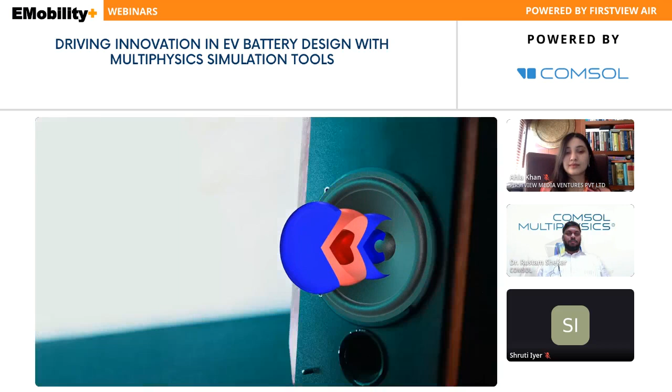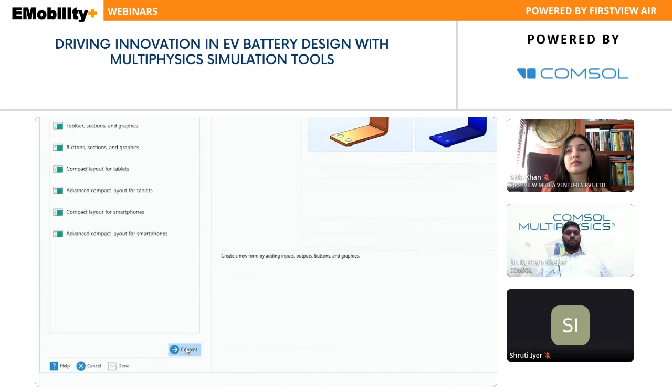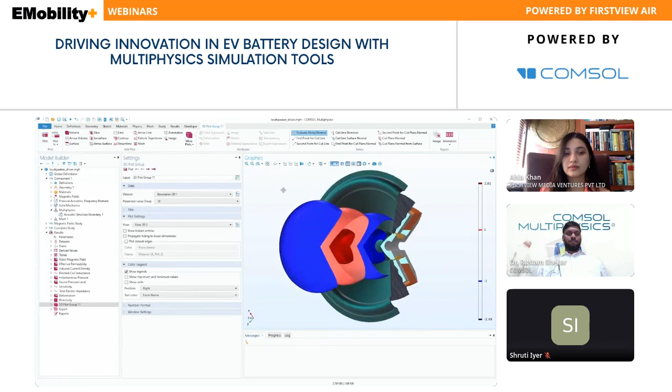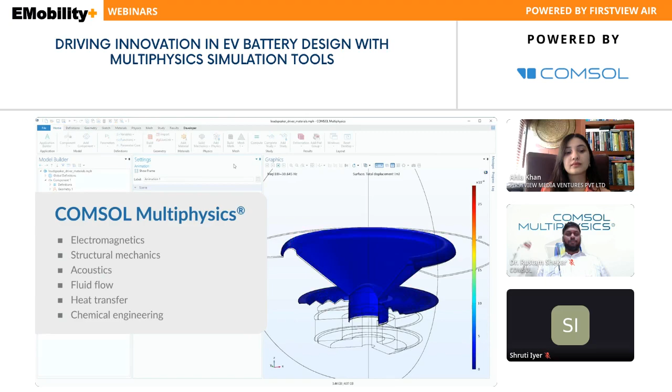Developing designs and performing experiments virtually is both cost and time efficient. With COMSOL multiphysics simulation software, you can be sure your results accurately represent the real world. By studying multiple physical effects on one model, no matter the order in which you combine different physics, the software handles them together and solves the mathematical and numerical model equations and provides you with the model results. The entire simulation process takes place in the same software environment. You only need to learn one workflow, no matter the physics involved or the nature of your experiments. Depending on the scenario, you may want to model single physics, one-way multiphysics, or fully coupled multiphysics. The COMSOL software offers all three, and the true advantage of COMSOL multiphysics is the ability to model unlimited multiphysics, where all physics in a model interact, affect each other, and together influence the model results. If you need to add any physics, including your own equations, to your model, you can. The application builder in COMSOL Multiphysics gives you the tools to build your own simulation apps. The Startup Wizard and drag and drop functionality help you quickly turn your models into simulation apps with customized user interfaces, restricted inputs and outputs, report generators, and more. This way, you can spread the advantages of simulation to colleagues and customers by compiling your apps as standalone executables via COMSOL compiler, or by making them accessible by web browser via COMSOL server. Understand, predict, innovate, and optimize your processes and designs with COMSOL multiphysics.

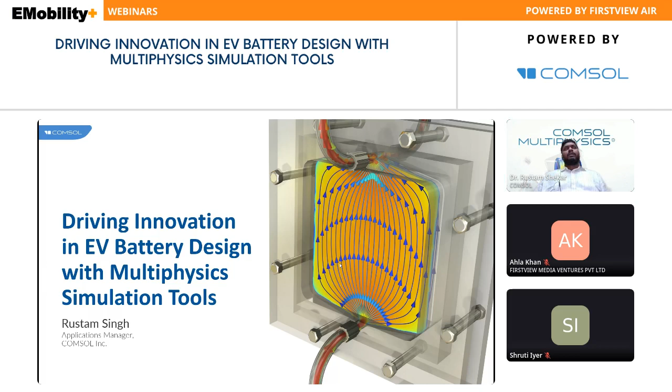That particular process may generate some losses, because no process in this world is fully efficient. Because of this entropy, you will get some heat generated. Now if you want to account for that heat generation and its effect on the battery system, we will take account of heat also. So this way the problem grows, and it becomes multiphysics in nature. You'll see how that particular problem can be handled.

Now let's see the entire scenario as a whole. What we see here is an electric vehicle. If an electric vehicle needs a power source, it will be driven by batteries or fuel cell. If you drive it with battery, you will have battery systems, and around that there may be different kinds of other setups involved - electric motor, generator, and internal combustion engine. If you have a hybrid vehicle, which is a current trend in India where you're getting multiple hybrid vehicles, those hybrid vehicles will have engines and batteries both at the same time.

Now that problem becomes more complex because sometimes you want to run your vehicle with the engine, sometimes with the battery, and when you switch from one power source to the other, the powertrain also changes. Based on that requirement, your power demand and your major data for information about your battery - the performance side, let's say temperature, or the SOC side, SOH side, or the thermal and heat generated due to that - will vary.

So that information will vary a lot. If you are able to simulate that particular scenario for your requirements, it will be much better to get a vehicle or battery pack which can fulfill your requirements without failing. So there is one more concern you can face, where there will be failures also.

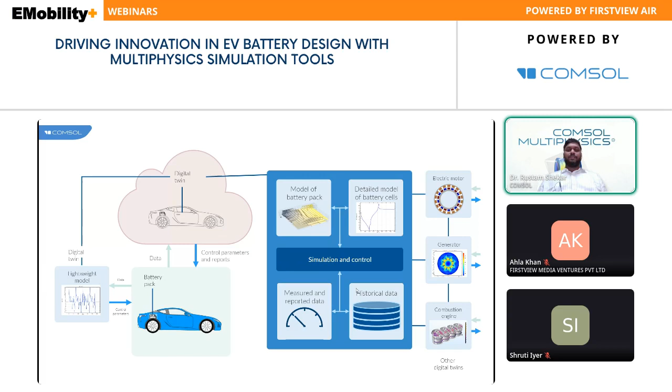So what we see is we have this battery model, and then you can generate digital twins out of it, where the digital twin can be trained using the battery model, experimental data, measured data, reported data, and historical data. Combining all of that gives you a realistic battery model based on physics, along with the digital twin trained using the multiphysics model and background or historical data.

Now, when you want to model the battery, there can be multiple scales you're interested in. Some people may want to know how a particular battery is built because they are the battery manufacturer. In India we can see this trend now, people are going towards manufacturing batteries on their own. Earlier, the trend was people getting batteries from other countries and assembling them into a battery pack.

So these are the different scales and different kinds of problems people face. When you are a battery manufacturer, you have access to all the material properties, so you can make a battery model very easily. But when you don't have that material property available, what happens then? In this case also you need to analyze your battery and make a battery pack out of it. These are the general problems people face.

Now let's talk about another problem engineers in India may face. Earlier they were working on the engine side, and mechanical engineering background people were working on that. Now there's a trend where those same background people go and work on the battery side as well. Because of this background difference, where more detailed electrochemical knowledge is required, there will be some problems modeling those batteries.

So you can see multiple problems people may face, and you want to answer those queries to make a battery pack, or use those battery packs into a complete vehicle. This is the problem and context we are going to address in this case.

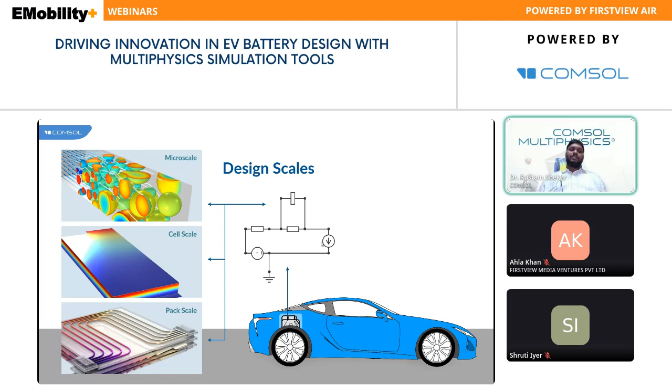Now there's one poll I just want to launch. I want to know if you are using any simulation tool, or using COMSOL, or you are attending just for personal interest. So what are you doing right now in modeling, and what do you expect from this session? I request the team to launch this poll so we can get responses.

I hope you all can see the poll in front of you. We just want to know: are you a COMSOL or regular simulation user, or are you new to multiphysics simulations, or are you attending for personal interest, or are you evaluating simulation tools for any ongoing or upcoming projects?

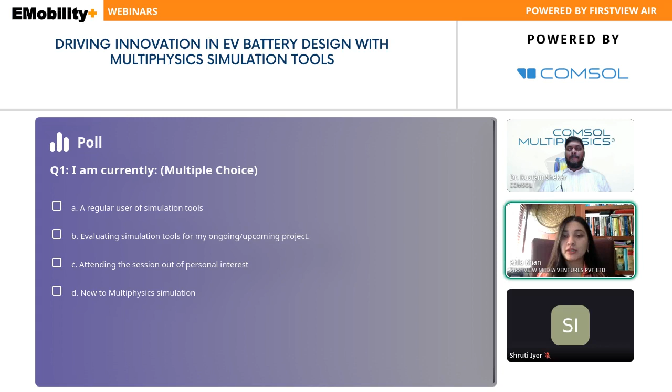Okay fine, thank you. So as we were discussing, we will be addressing those queries. First we can introduce you quickly to the tool we're talking about, COMSOL Multiphysics, how it can help you, and then how it looks, what kind of capabilities are available to fulfill your requirements.

Let's say you're starting a project where you are at the modeling stage, and there will be a team involved in that. So how can that particular tool help you at all those stages?

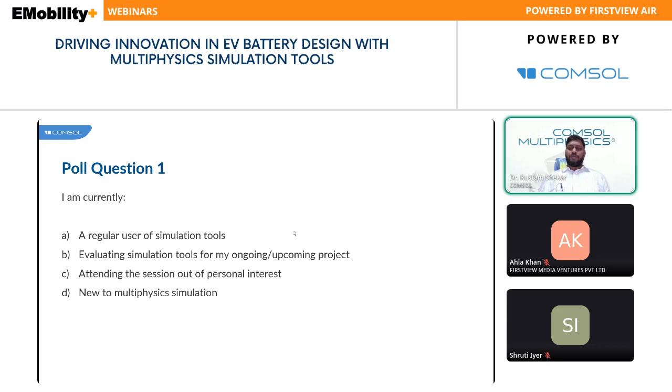Just to start with, this is the COMSOL GUI, the COMSOL Multiphysics suite, where we have one platform called COMSOL Multiphysics, and then there are different other physics which can help you design different aspects of your e-mobility components.

Here we can talk about the battery design module, fuel cells, and we can add CFD and heat transfer to get a better model. In some cases structural mechanics also plays an important role, so that will be there too. You may be interested in any kind of RF or AC/DC electromagnetic components, and then you can couple it with different tools like MATLAB, Simulink, or other CAD tools.

So now you can see if you have any problem which is multiphysics in nature, and if you talk about battery specifically, it involves features from the battery side, it may require features from the chemical reaction side, it may require features from the corrosion side. This corrosion is an area people generally neglect.

Let's say you have a battery connected to a terminal. Now the terminal and the battery are both metal, and it's exposed to humidity. Over time you will form a galvanic pair, and that galvanic pair will give you some contact resistance. Because of that local heating, you may see local failures occur. So you may need corrosion modeling, heat transfer and CFD modeling, and when you want to design flow fields for your cooling channels, there can be pipe flow involved.

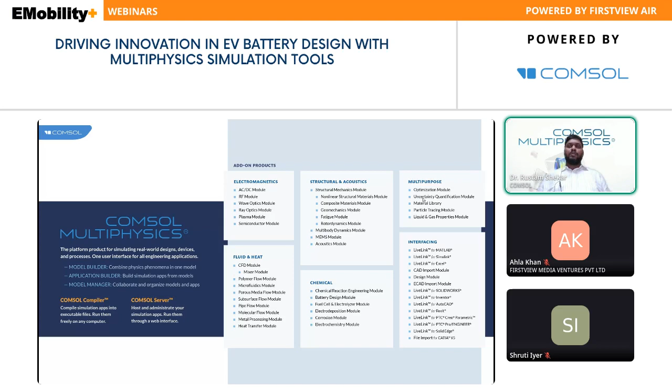For now, we will just go through the introduction for COMSOL and then see the battery design module. Here, if you want to work on a problem which is single physics in nature, as we discussed in battery.

You can just focus on the heat transfer, you can focus on the fluid flow, you can focus on the electrochemical reactions, or you can focus on the structural part of it. So the problem can be single physics.

But in other cases where you have a problem which is multiphysics in nature, and you want to solve all those physics and coupled behavior all together, then it's a multiphysics scenario that we can solve for.

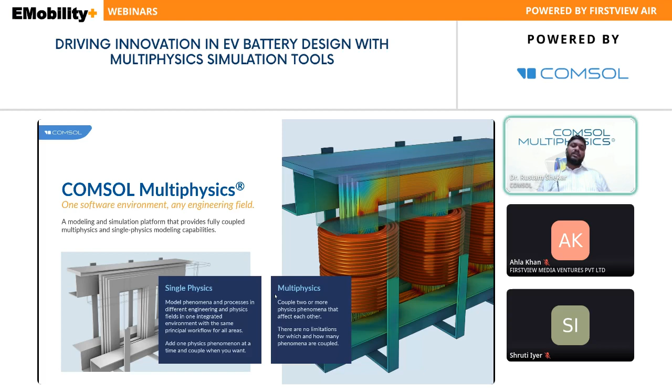So now to do that, we have this environment, the COMSOL GUI, where all required things for the modeling will be available.

Let's say you want to make one geometry, assign materials to it, assign different physics, and then couple all these three physics by using this multiphysics node.

And there can be multiple analyses which you may be interested to do, so different analyses can be done by the same interface. Ultimately you can post-process and draw conclusions from those analyses, and post-processing will also be available in the single GUI.

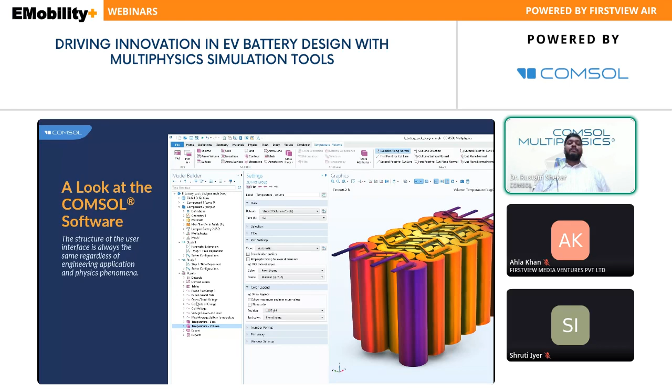So you can see things in detail, let's take one battery example. To make a model, first you need a geometry.

So you will take the geometry, and that geometry can be an imported one. It can come from any CAD tool, or else you are creating a parameterized geometry here itself.

So then you can create that geometry, and the geometry can be parameterized. You will have all those operations, let's say extrude, work planes, and so one complete parameterized geometry can be created here.

The next thing you may want is to identify which domain is built of what material. So there will be one battery material, air surrounding the battery, aluminum for bus bars, copper for bus bars.

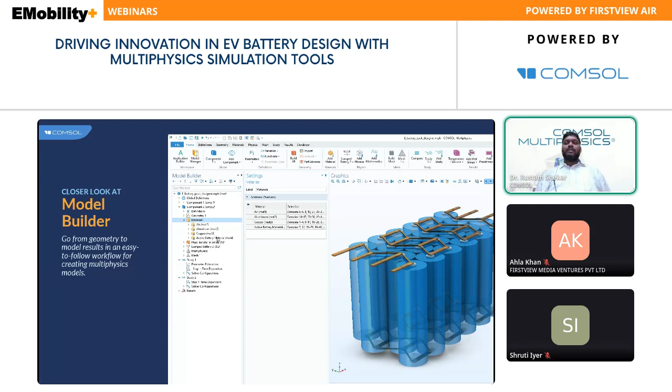And then you have the active material which is for the battery. So we know how my battery pack will look like, what components will be there, and what material they will be made of. So we'll have the geometry and material defined.

And those materials may have different properties which may be required, or which may not be required. So all material properties will be listed, and the required material properties will be highlighted in this case.

And next, you want to know how that will function, meaning which physical phenomena will govern this particular device. In this case, we know that for the batteries we want to analyze, we use the battery physics, and that battery physics can be detailed.

Here you can visualize and see which equations you are solving. When you know which equations you are solving, you will be confident that whatever you are solving is good enough, or else you want some modification and want to correct them. In that case, corrections will also be available for you.

So it's not a black box which you are solving, and then you can get confident about the physics which is running in background. You may see, in some cases, other physics also comes into picture. Now here we want to add heat transfer to it.

So this is one general form of heat transfer which we are going to solve. And now your battery material may require specific space dimension, material properties. So when you see a jelly roll, through the plane and across the layers, along the layers, there will be different conductivities you will experience. So if you are able to assign properties where they are non-isotropic in nature, that will help you get more near to reality. So those kind of specific features you can see to design those kind of batteries.

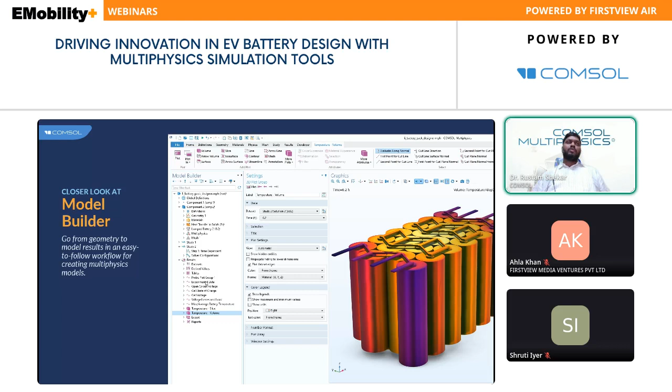So that way, you can do your entire modeling study. So now you are one modeling engineer who knows things in detail. So you are a modeling engineer or the app designer. You can create a model in detail, and that model has all required details, and it is a completely editable model which you have, and you can create models for different scenarios.

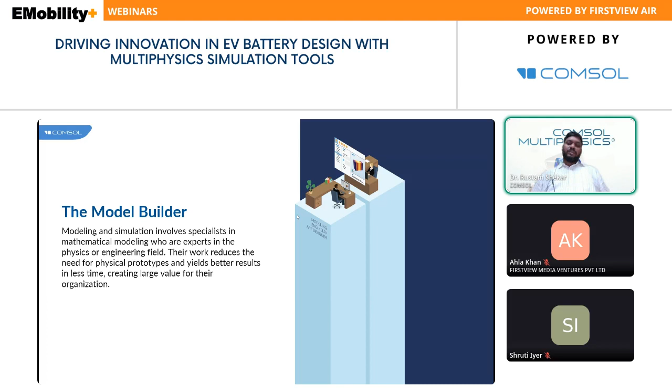But let's say you want to collaborate with your team, and the teams may come from different other backgrounds like mechanical, electrical. They can be from non-technical background like sales. They can be from marketing. They can be from different other departments. So then, what you can have is you can create simplified GUIs, which we call applications.

So the app can be created by using those models, and the real model which you have built will be running in background. So that way a different GUI will not require much competency and much knowledge to solve that model, but the other team can just put some inputs, and then they can visualize the results which they want. So you can create one customized GUI for different teams for the same model.

So let's say you want to create a model for your design team. There you just want them to change geometry, and then they will change the geometry and analyze the different designs with that. You want to make a model or app for your sales team, so then they will go in the field and demonstrate how your models and batteries are behaving for different conditions. So then that sales team will take that app, which is a very simple GUI. They can put in that number and run the model in front of their clients and customers, etc.

So it is not necessary to have that technical competency to work with those kind of applications, and those apps can be designed very detailed, very simplified, for different aspects and different kinds of people. So collaboration is one key thing you can make sure of.

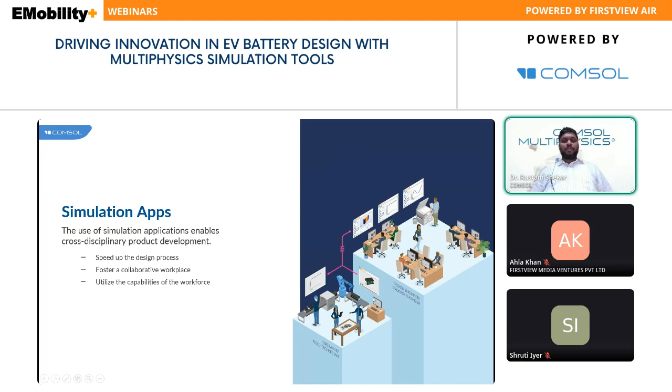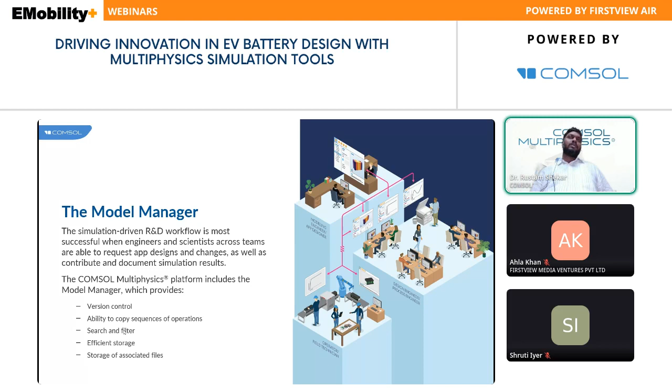And then we can host this entire research or the entire project into a model manager, where you can do the version control. You can provide different kinds of filters. You can efficiently store your models, and you can provide specific access to specific people. So then you can control your research and maintain or ensure your privacy as well.

So this is one brief introduction of how you can deploy this tool for different aspects and different areas. Now I just want one more piece of information from the audience: which problems do you face in battery analysis?

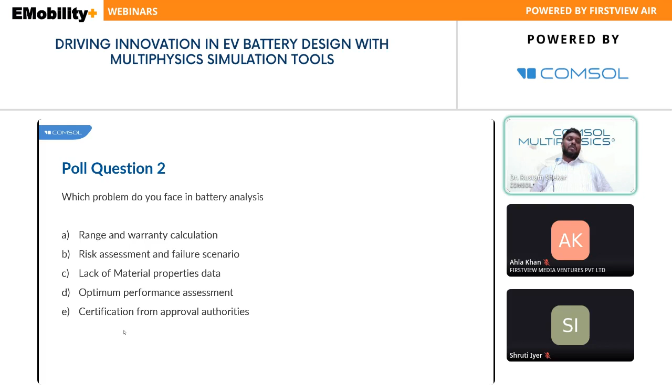Is it the range which you are talking about? Is it really risk analysis, risk and assessments, or lack of material property data? You don't have material property and you want to do a modeling part. You want optimum performance assessment, or you want help in the certification from the approval authorities.

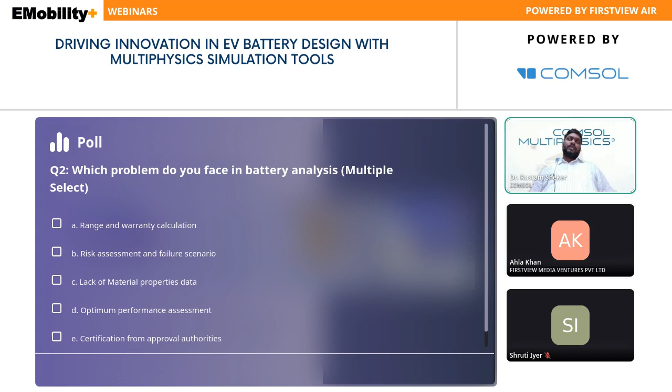So while you're providing responses, we can talk about the things which we are going to talk about. So we will quickly be seeing what all you can do when it comes to something very specific, battery modeling in this case. So I hope you can see the presentation now.

Yes, sir. Okay, thank you. So what we'll do is we will see how we can utilize this tool for your applications.

So when we talk about battery, the first thing that comes to everybody's mind will be lithium ion, but it is not necessarily that you are working on lithium ion. You may work on lead acid batteries, which are conventional batteries still being used for auxiliary power in bigger and smaller vehicles, and they are a bit cheaper also. You may be working on future technologies like sodium ion batteries or flow batteries for large scale energy storage, or you are working on a current trend which is lithium ion battery.

So when we talk about battery modeling, it is not only about lithium ion; it can be anything in the domain. So if you wish to work on any kind of battery, all major battery chemistries can be modeled. Why is this possible? Because you are working with the Nernst-Planck theory, and the Nernst-Planck equation can handle any kind of electrochemical setup. Only the mode of mass transport and materials may be different, but the physics will remain the same to drive that kind of particular setup. So we have the Nernst-Planck equation to solve for them, and then there will be different chemistries, different components like porous electrode and solid electrode taking part in those reactions. So we have the Nernst-Planck equation which can handle all kinds of battery chemistry.

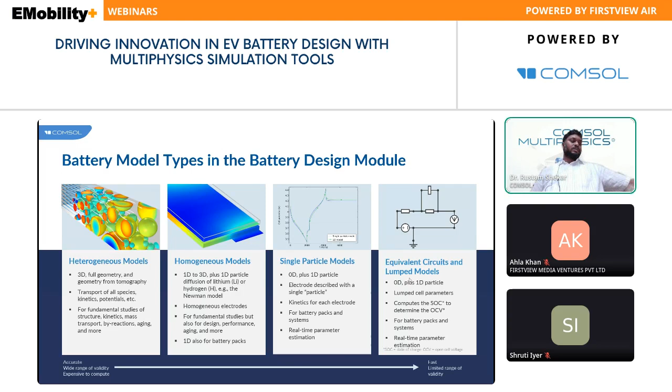So now we can see two different groups: those who work on fundamental batteries and have material property, and those who want to make a battery pack, or don't have permissions to tear down the battery because of NDA issues. Either way, you can utilize these tools - various problems and various groups of people can use this tool for their applications.

Now let's talk about different scales. Let's say you are at micron scale, or pack scale, or you're starting from micron scale and want to go up to pack scale - that entire range will be available, so you can model those different scales in this case.

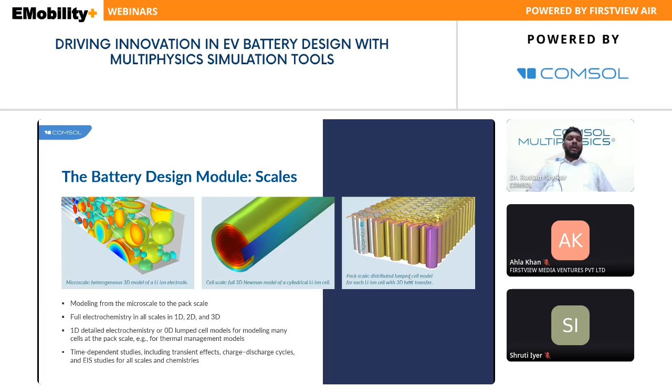So there will be a full electrochemical model, and you can do the thermal modeling in this case. Now we know how we can model one battery with our available data, based on our background and the level of complexity we want. There can be different kinds of studies possible - transient studies, impedance plots, and you can utilize them for parameter estimation.

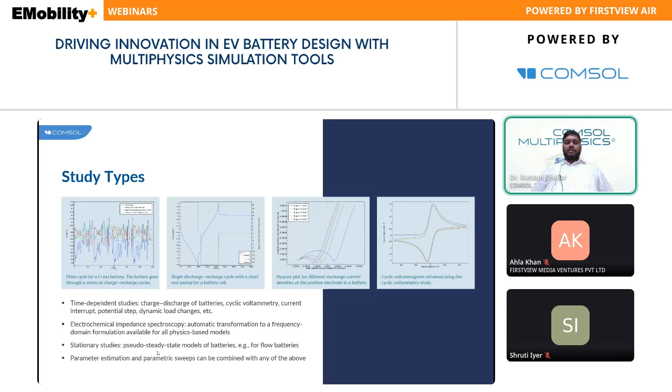These are the typical studies we discussed earlier, which can be utilized to validate your model, to do parameter estimation, or to analyze parametric sweeps to know the performance at different operating conditions. Let's look at one simple model, a 2D axisymmetric model.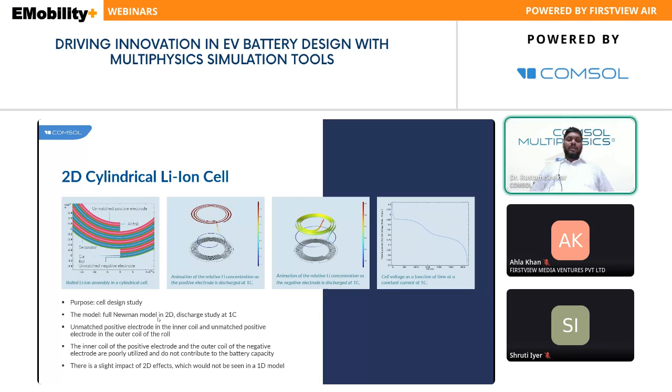Now you may get interested to know, what if I want to make a 3D model? So let's say you can make a 3D model. But what happens when you go by jelly roll or pouch cells? We just want to know: should I stay at the 1D level, or should I go to the 3D level? It is possible to create a 3D model.

But what happens when you compare your 1D model and 3D model? There's only a 2% deviation. So wherever required, you can utilize the 1D model as a heat source or as a performance indicator, and 3D models may not be required.

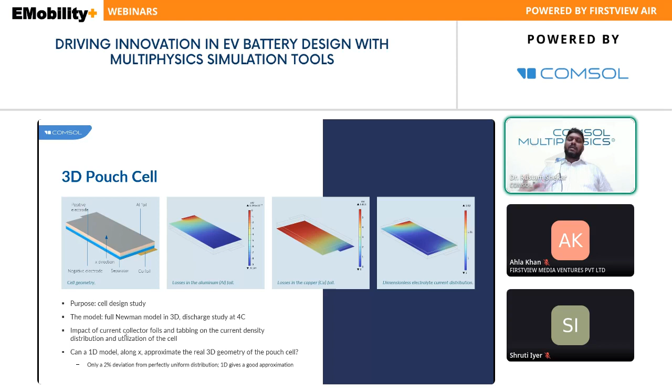But in some cases it is required—let's say you want to design different tab conditions, try different tab locations, try different materials, or make modifications to the geometry. You may have a jelly roll or a stacked prismatic cell. There are various kinds of analyses and ideas being implemented nowadays in batteries, so you can try those 3D setups also.

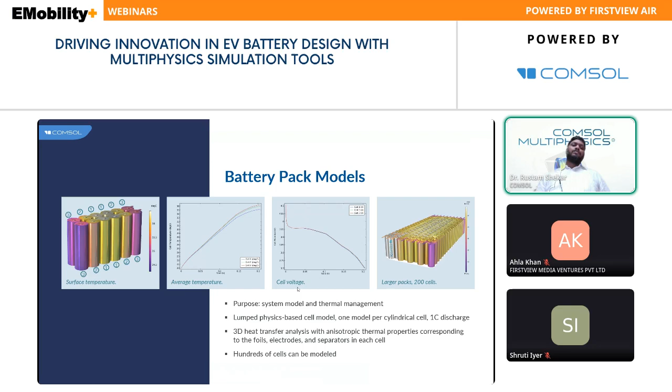This is all about the battery specifically, but for people who want to make a battery pack, I can create a battery pack model for them, with systems and models to be built. In this case, we can extend those lump models to build a 3D thermal management model. So you have a 0D lump model, add 3D heat transfer, and create one battery pack model with that.

But why is this required? Why maintain temperature or thermal management? There are various scenarios where cooling is needed. You have accelerated degradation, like SEI formation and gassing, at higher temperatures. When you cool it down to the optimum temperature you want to maintain—around 25 to 45 degrees Celsius—that will slow down your deterioration. So you want to cool down the battery to slow down degradation mechanisms.

Let's say you have a battery pack and there is hotspot identification involved. You design your battery pack for uniform temperature or a controlled temperature gradient, but then suddenly you figure out there are hotspots. Those hotspots can lead to accelerated aging and may even give you a risk of thermal runaway, so that local point is pretty dangerous. If you want to identify whether your design has any hotspot, we can do a coupled analysis for thermal management and hotspot identification.

If you are selling or making a vehicle for a cold environment, you also want to maintain the temperature around 25 degrees Celsius. All these things I'm talking about are in the context of lithium-ion batteries, which require a temperature range of about 25 to 45 degrees Celsius. So we want to heat up the battery at startup or when working at low temperature conditions.

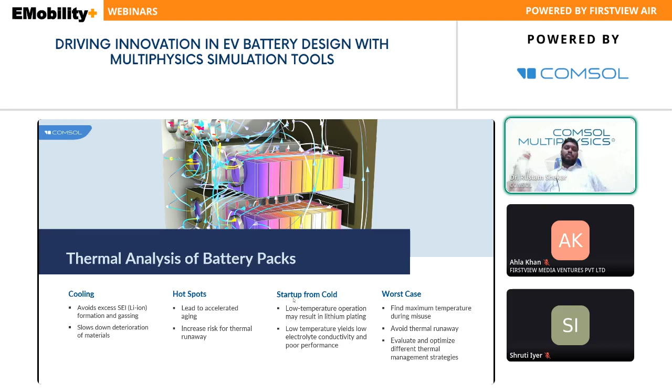And in the worst case, it can fail, and you want to know the thermal behavior of the batteries so you can analyze those battery packs. So what mode of heat transfer will be available?

Generally there is conduction, which is taking care of everywhere. In the battery, you will see it's all solids, even the gas filled in it or the fluid material filled in it - it is conduction only. So the first thing you want to solve is conduction, and then later you want to solve the advection if you are having active cooling.

You may have air cooling, immersed cooling, or any kind of cooling channels. So advection can also be solved at the same time, whether laminar or turbulent flow, where you can deploy fans or any kind of cooling channels. So those scenarios are also available in the case of advection.

Conduction and advection are sufficient to analyze one battery and battery pack, but you may see one scenario where you park a vehicle in an open environment, and sun rays coming on that vehicle cause your battery to heat up.

So if you want to know where to place the battery in the vehicle, you want to know whether radiations will affect your battery, because you can place your battery very near some other component, and that may radiate heat - let's say a radiator which is cooling the battery may radiate heat. So the location and orientation because of radiations will also be important.

Surface to surface radiation, surface to ambient radiation where it is cooling down, and ambient to surface radiation may also play a role when you want to test it for those conditions. So then you can integrate all these three and see how your battery will perform in conduction, advection, and radiation cases.

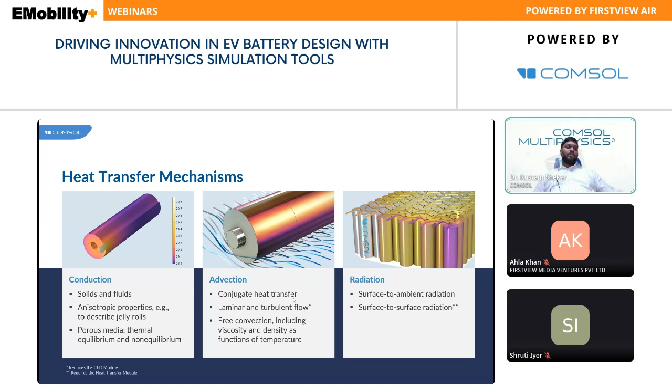So we know why to do thermal management, and now we know which approaches we can deploy, including battery modeling. So what will couple both of them? Your heat transfer and battery get coupled by using these heat sources.

The heat sources can come from joule heating, electrochemical reactions, heat of mixing. If you're able to plot them specifically, what you obtain in this case is the different components which may give you that heat source.

You have the joule heating that comes from the conduction parts, the ions and the conductors. You can work on those materials if it's in your control. If there's a chemical reaction, then if it's any kind of catalysis you can work on it, or else you want to limit your operations for certain C rates, certain loading conditions.

And then you want to give a warning to your user that okay, don't go beyond this speed, don't go beyond the C rate. So those electrochemical reaction or joule heating scenarios can be calculated, and then you can give the exact warning when you want to provide a manual to your user.

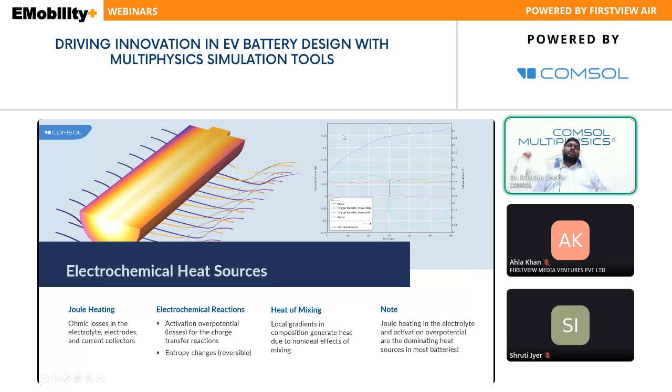So now you know what heat source is available, and you're plotting them individually. So you're making sure that you're talking about the right things in this case.

So let's just take one example - what will happen. Let's see, we have one huge stack. We talked enough about individual cells and the battery. Now we'll talk about one huge stack.

This huge stack has four lines, and for each line there are 14 cells, and there are 8 modules available. This gives you a very huge stack which is having 300 amp-hours per line, and then you can generate 360 volts out of it. So one huge jumbo stack is available to you.

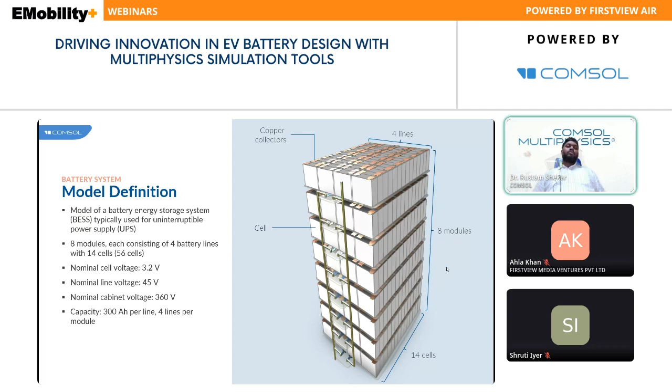So to pull down the heat, you may require a thermal management system. There will be plates available, and in that plate we will have coolant flow, with flow in vertical pipes and horizontal channels, and you will see the coolant being used for that.

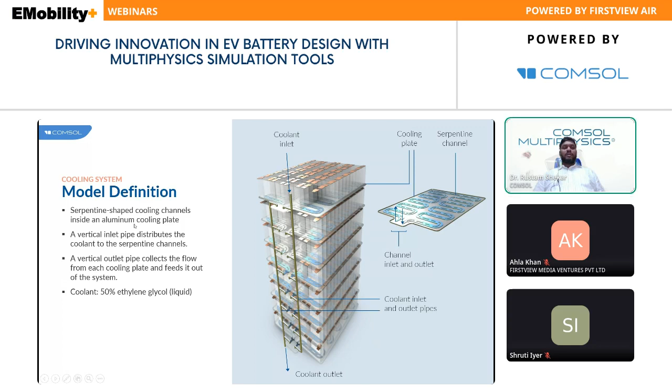Now let's say if you want to make a battery pack model, then you are focusing on voltage loss and capacity loss, and in this case you are seeing the equations being solved. One detailed model gives you heat sources, and if you run it for 6 months or 1 year, the variation in heat sources can differ from the first cycle to the last cycle.

So you bought a vehicle, initially it was not heating up much. After 1 year you see the heat generation is more, so you have to deploy more coolant, and that eats up your battery more, and again you are losing capacity. So that cascading effect will be there, and ranges may get decreased.

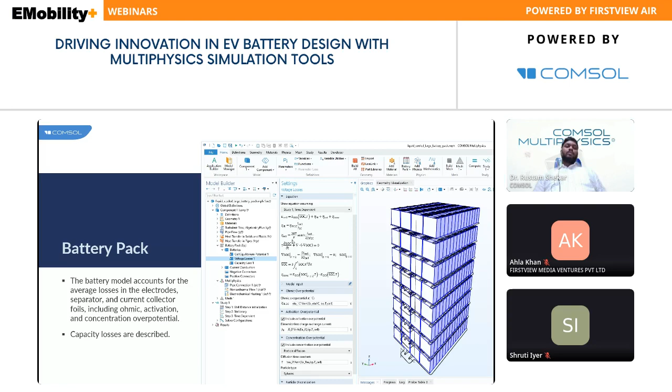So you can solve voltage loss and capacity loss at the same time, and both will affect each other, and ultimately you can couple them by heat transfer, and generate results like this, where we are seeing the temperatures, the electrochemical profiling, what is the maximum temperature, and what flow rate you need to provide for optimum cooling.

So now we can identify the hotspots, identify what the flow rate will be, how the battery is performing for that particular condition, and monitor the maximum temperature. So this covers all three concerns, where performance, risk scenario, and capacity are being considered here.

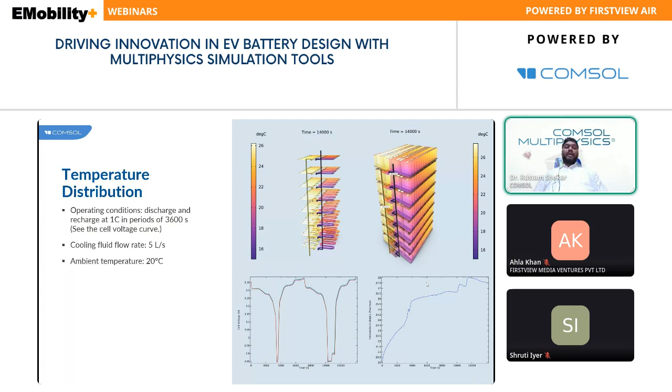So now let's see one example of how that will be built in COMSOL. We can open one COMSOL interface, and the same model can be used.

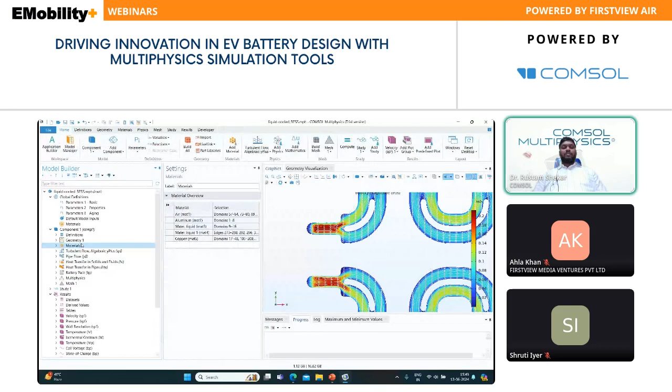So this is the GUI we talked about, and here we have the geometry we want to work with. Let's hide this. So this particular huge stack is available, and here we are deploying turbulent flow, pipe flow in the channels. We have heat transfer in solid fluid, heat transfer in pipes, and then there will be the battery pack, with the same details as in the presentation available for the batteries, which is your voltage loss and capacity loss.

So this scenario is available, and we can analyze the heat sources, analyze the velocities, and see that particular stack in detail. If there is analysis wise, you can play with different analyses, stationary or time dependent, and you can see the meshing also being done here itself.

So this is how we can analyze one battery pack in detail. Now let's see what other details may be required to model there.

So now there will be thermal runaway and aging, which can concern you. Aging wise, there will be plating, short circuit, gas evolution, loss of electrolyte, SEI formations. All those degradation phenomena are available, and if you know them, you can model that.

But in case where you are not aware of these phenomena, and the material property and relevant data is also not supplied to you, in that case you just focus on the operating conditions like current, temperature, aging history, and we can see the capacity loss calculations.

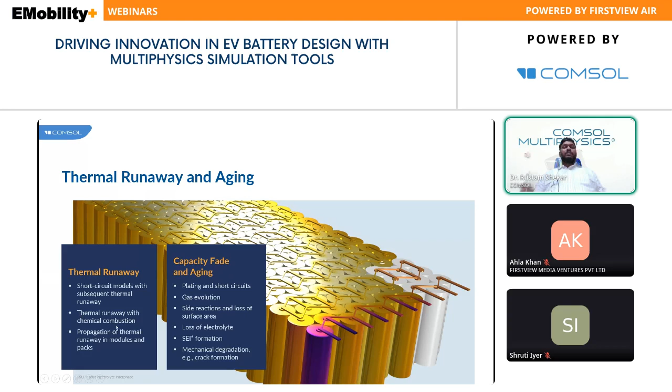And in the worst case, when there is a thermal runaway, it can be because of internal short or external short, and that also can be tackled in this case, and we can see the propagation. So we will see one example where we can animate that as well.

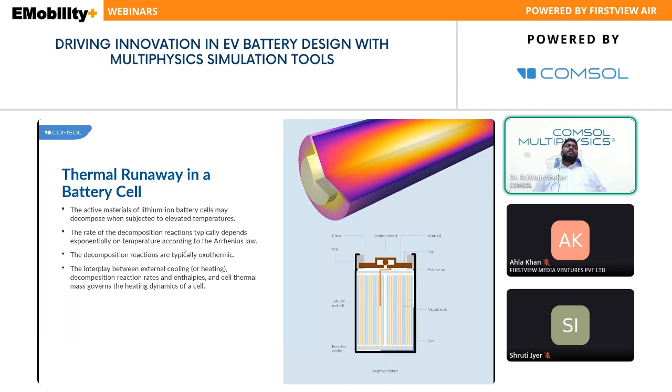So let's say there's one cell which can trigger, which can have all these details, and you want to analyze it. There will be exothermic reactions which you want to model, and ultimately you will see at what temperature, at what condition your cell is failing.

You can extend it for the pack level where there is pack simulation, and then you can see the failure because of, let's say, only conduction, only due to gas venting, and because of any kind of combustion reactions.

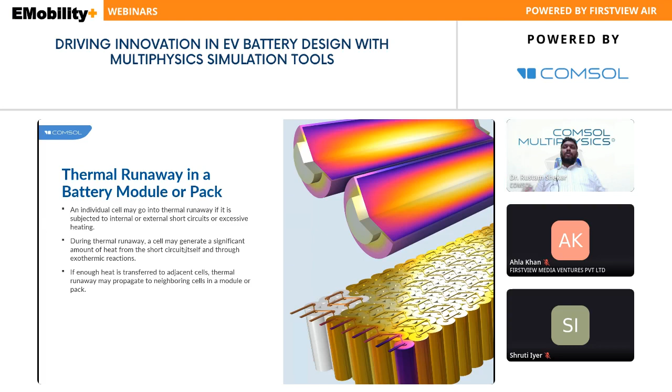So it can be a combination of anything where the propagation is happening due to conduction, gas venting, or combustion reactions. If you want to model that, we will again have the same interface called battery pack, and then we can trigger those thermal events.

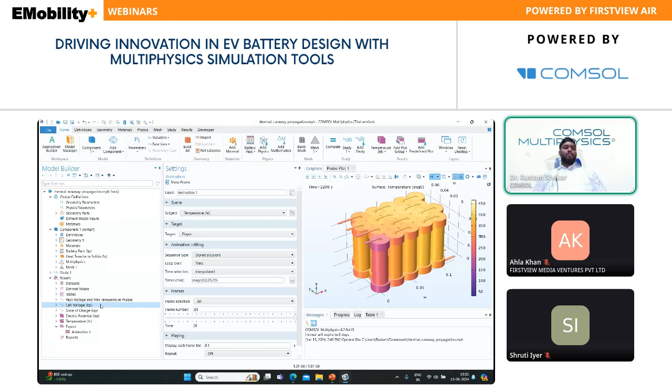Thermal events can be due to any temperature or specific condition. So we deploy them and do the thermal runaway propagation test. What kind of results will we obtain? We can obtain this animation showing how the propagation is happening, and we can see the voltages, and because of voltage we can also see how failures are happening.

So let's see temperature and voltage at the same time. When we see temperature, it's getting failed, and we can see the T max shoot up, but average temperature is getting decreased. Then there will be subsequent failures, and those failures will give you the T max rise, and T average also rises, and ultimately the battery will die off and the temperature will start reducing.

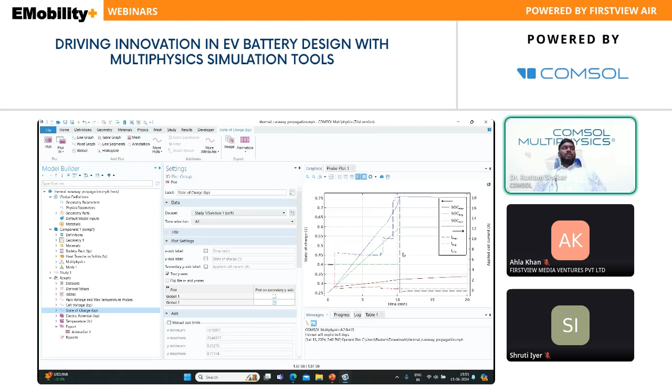Similar things can be observed using SOCs. You can see one completely discharged cell also will be available to you. So this is how we can do the thermal runaway assessment.

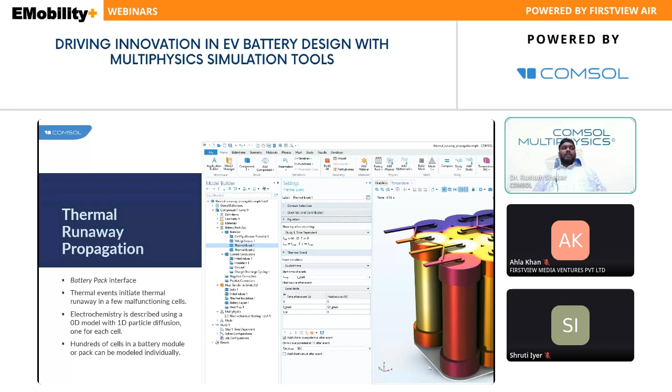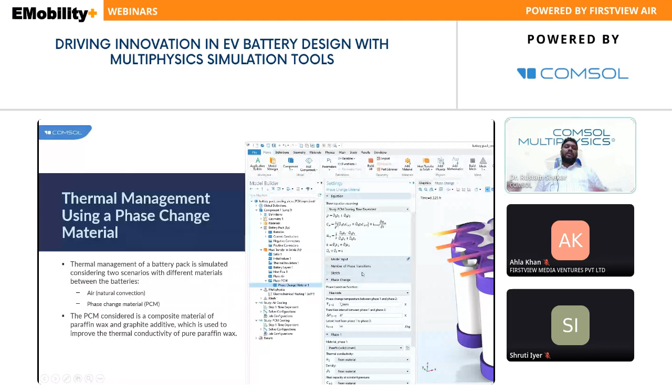When we know there is a thermal runaway, what can we do about it? There was a previous example where we saw liquid cooling is available, and you can also deploy phase change material. That phase change material can be deployed easily in the heat transfer, and we can compare air convection versus phase change heat transfer to see what the performance change will be.

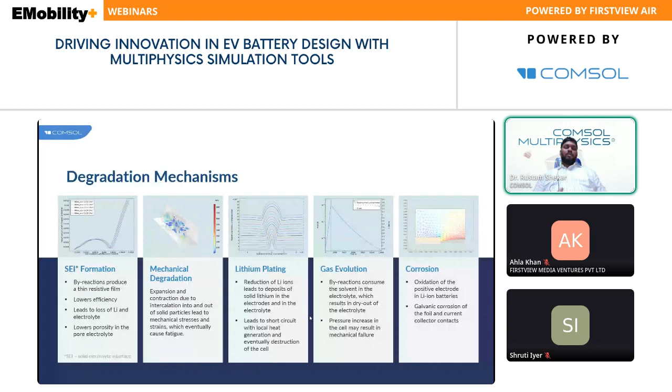You can add different degradation mechanisms in different forms and individually monitor those in detail, and ultimately when they all come together, we can see the loss in capacity in terms of storing. So you can make a battery pack, store it, and after one year you will see that you lost some capacity.

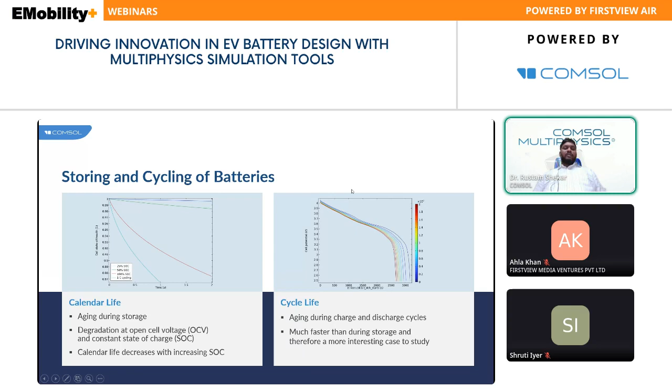So at what condition should we store the battery, at what condition should we use the battery to get optimum performance, or the reverse case - if you used or stored it at a certain condition, what was the outcome? There can be calendar aging and cyclic aging, and those also can be performed in this case.

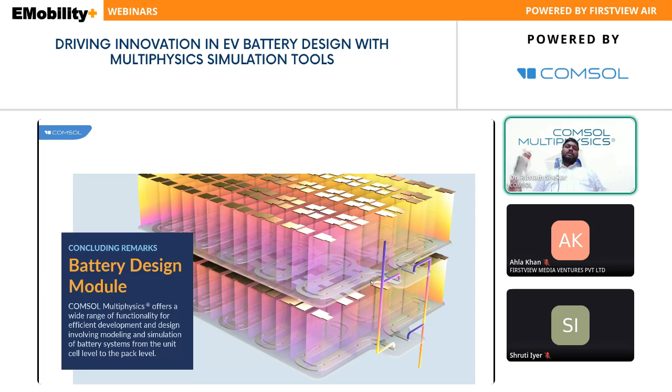So just to conclude, now we can use the battery design module for various applications, by various levels of competency with different people, and we can utilize it very well for different applications.

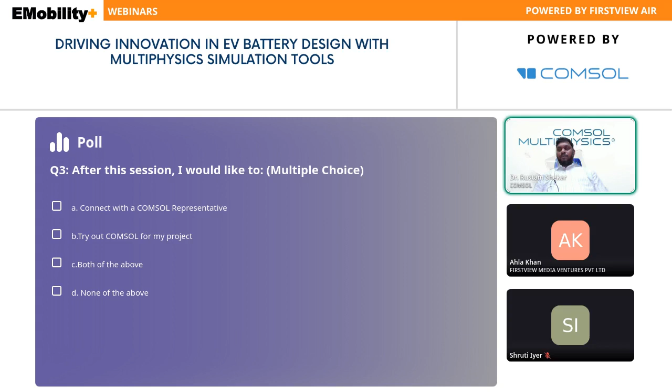Let me go to the forum where we can see the questions. As I can see, there are multiple questions posted at different times. Let's see what questions we have.

There's a question asking will you be sharing the presentation deck? I'm not sure, I have to check with my team.

There's a question about what are the latest innovations in the field of battery design. It's a very generic question. If you wish to know what innovation has been done, people are working with different kinds of materials.

So people are moving towards silicon batteries where you get larger capacity, but at the same time there are drawbacks like mechanical degradation. So people are working on different kinds of materials, different flow and cooling mechanisms, and different battery pack designs. So innovation-wise, it can be from the material side, the performance side, the design side, or else from the fundamentals, let's say electrode modeling or pack modeling.

There's a follow-up question: what type of simulation studies are done and which leading experts conduct them? We can have different simulations as discussed - for performance analysis including thermal management, structural mechanics, or capacity loss analysis. We can also see different analyses from risk scenarios, where those scenarios are modeled and we can perform simulations for that. So it depends on the person, and we can see what area they work on.